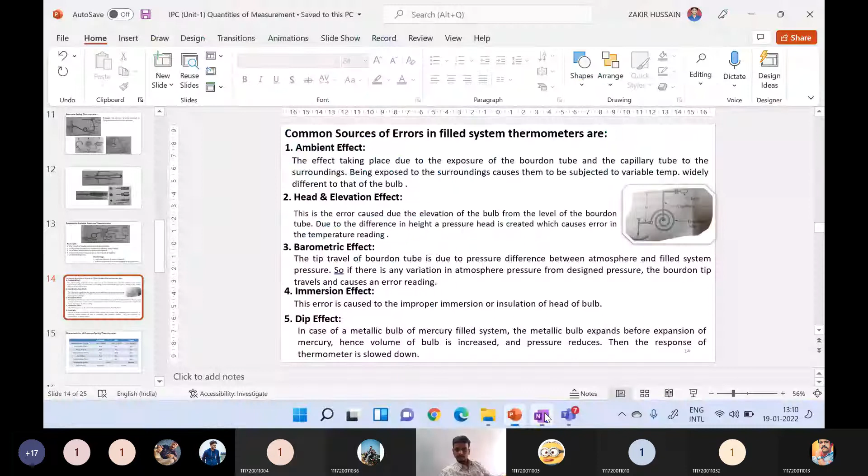So the first one is the ambient temperature effect. What is this ambient temperature effect? At this thermometer bulb condition, there will be some other ambient conditions. Some contaminants will be there, some temperature differences will be there at this particular location. The ambient temperature effect is caused due to the temperature difference between the surrounding atmosphere and the measuring bulb. The measuring bulb will have a certain temperature TB, and the surrounding ambient will have some ambient temperature TA. Because of this difference between TB and TA, some errors will be produced. That type of error is called the ambient temperature effect.

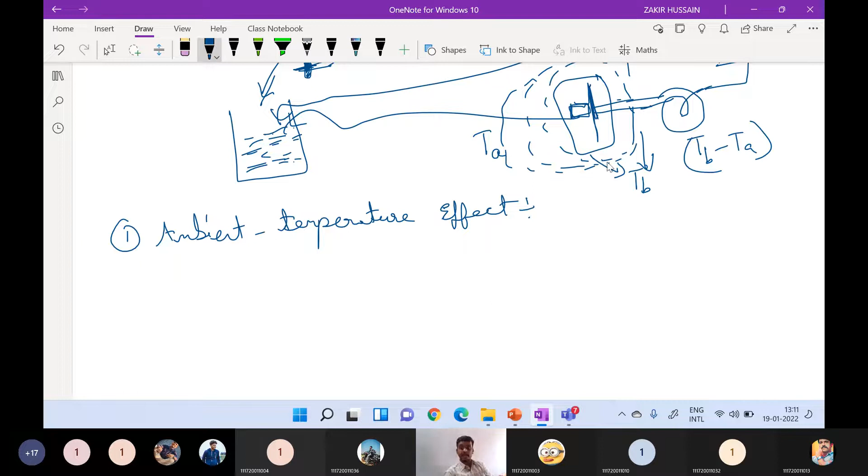Therefore, it needs to be compensated. That ambient temperature compensation needs to be adopted in such types of thermometers. Especially this is a special case in the gas expansion thermometer, the pressure spring thermometers. Why? Because whenever there is a difference between the ambient temperature and the bulb temperature, what happens? The pressure which goes inside the capillary and armor is received by the receiver, like a pressure gauge, the pressure spring. So this pressure spring deflection will be limited, or it will be more. Anything can happen due to this temperature difference between ambient and the bulb temperature.

Then the degree of this ambient error, whatever ambient error is produced here, depends on the temperature range of the instrument and the relative volume of the bulb, capillary and receiving element. The ambient temperature effect shows not only on this receiver, but also depends on the temperature range this particular thermometer possesses, the volume of that particular bulb, and how the capillary and the receiving element are. The receiving element is the pressure spring. This is the capillary and armor, and this is the bulb. So all things will be affected by the temperature effects caused at the ambient temperature conditions. I hope this is okay.

Ambient temperature effect. Do you understand that one? Yes, sir. Okay, then next one is head effect.

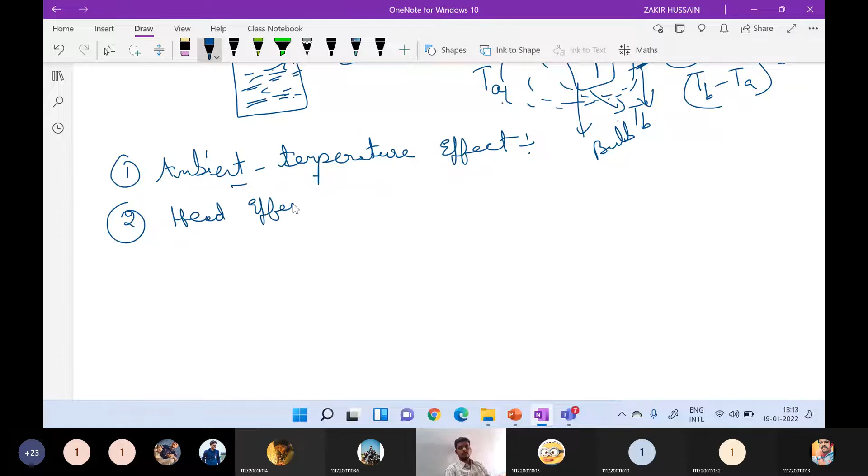Then the next one is the head effect. What is the head effect? For example, due to the change in the elevation of the bulb, whatever effects are caused are called head effects. In a pressure thermometer, if you consider this as the standard elevation of the bulb, the receiver can receive an accurate temperature prediction or accurate pressure deflection.

But the operator will locate this bulb at some other elevation, either a lower elevation or a higher elevation. Due to this elevation difference, whatever pressure difference is caused inside the capillary and armor will directly affect the pressure receiver, the pressure spring. The pressure spring receiver receives less pressure or more pressure, and there will be an error in the reading. So the head effect in the pressure thermometer is usually caused by placing the thermometer bulb at a considerably higher or lower elevation than the receiving element.

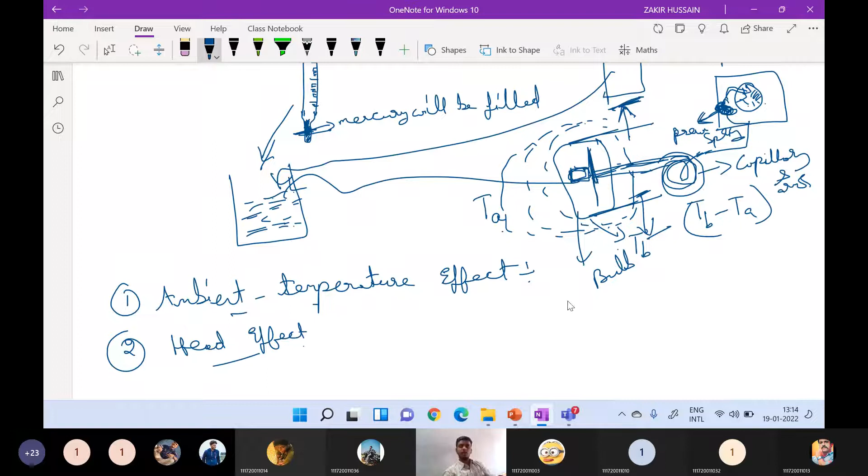So there should be some ideal position for this one. Otherwise, the operator usually will place the thermometer bulb at a higher or lower elevation. Due to this head effect, the bulb and the receiver, whatever the lesser or greater pressure which is caused, will directly show an effect on the pressure spring, which is the receiver. Due to this, there will be an error in the reading of the thermometer. That's what head effect is, caused due to the elevation difference, whether it's higher or lower.

And the third one is the barometric effect. Can anybody say what is barometric pressure? What is the relationship between atmospheric pressure and barometric pressure? So barometric pressure is nothing but atmospheric pressure. Barometric pressure or atmospheric pressure, both are the same.

Whenever the surrounding atmospheric pressure is different compared to the inside bulb pressure, then there is an effect called the barometric effect. In pressure spring thermometers, the error in the instrument reading is due to changes in the barometric pressure. Depending on how much fluctuation there is in the outside pressure, there will be corresponding errors.

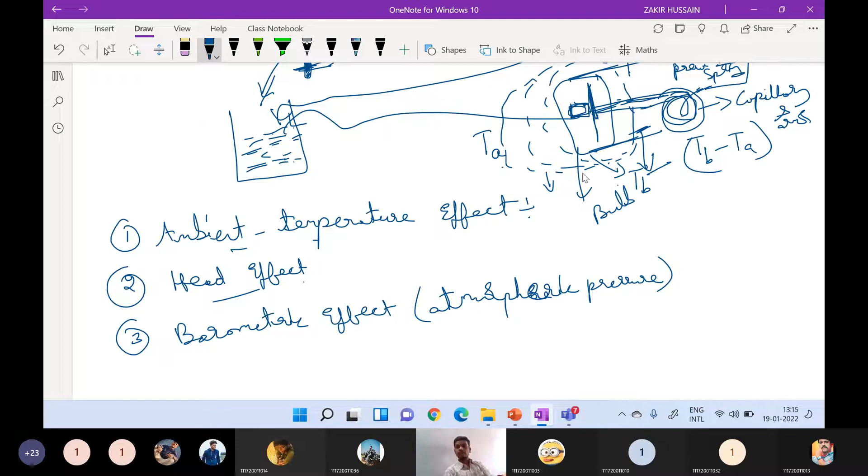The error occurs because of the pressure spring deflection. If the outside atmospheric pressure is very high, whatever pressure is exerting here will cause some effect in the pressure induced inside the capillary, armor, and bulb. This induced difference in pressure directly attacks the receiver, and corresponding error values will result from the external and internal pressure changes.

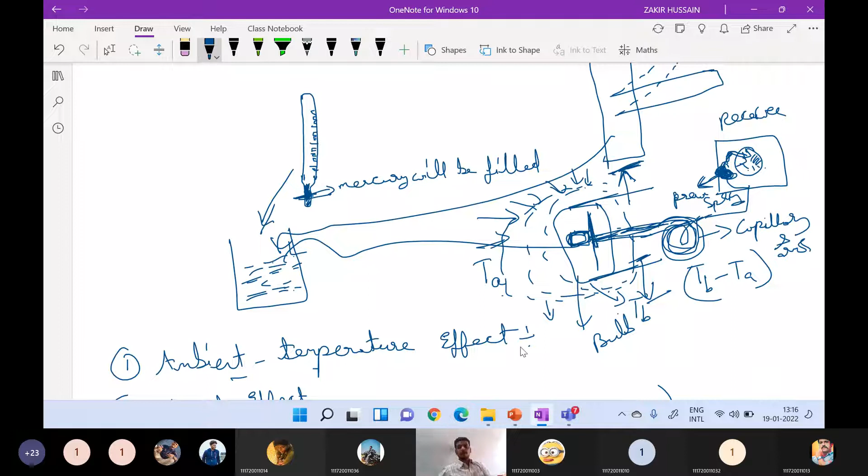So corresponding errors will be produced. Usually there should be some compensation for this. Barometric pressure, for example, is nothing but atmospheric pressure. And also we can say, what is absolute pressure? Absolute pressure is nothing but atmospheric pressure plus gauge pressure.

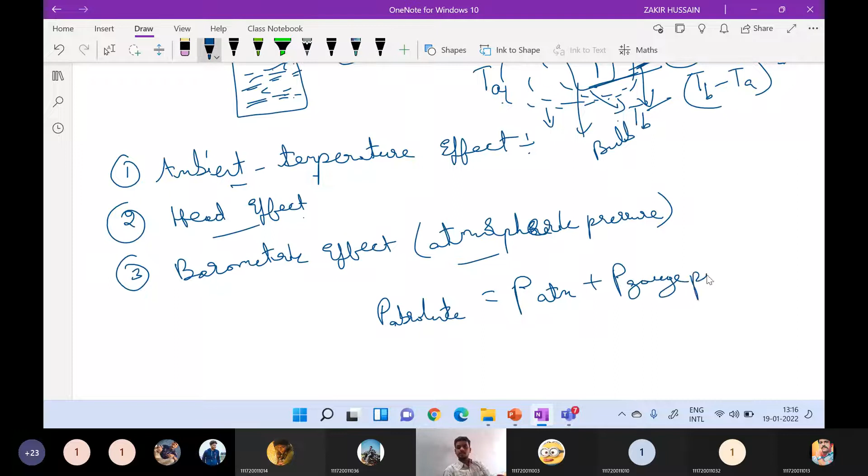Gauge pressure means, as you might have seen in the fluid mechanics course, whatever the manometers measure, that is called gauge pressure. A U-tube manometer or an inclined tube manometer, whatever pressure they measure, all these are called gauge pressures. To calculate absolute pressure, we have to add this gauge pressure with the atmospheric pressure. Then only it is called absolute pressure. That's the difference between absolute pressure, atmospheric pressure, and gauge pressure.

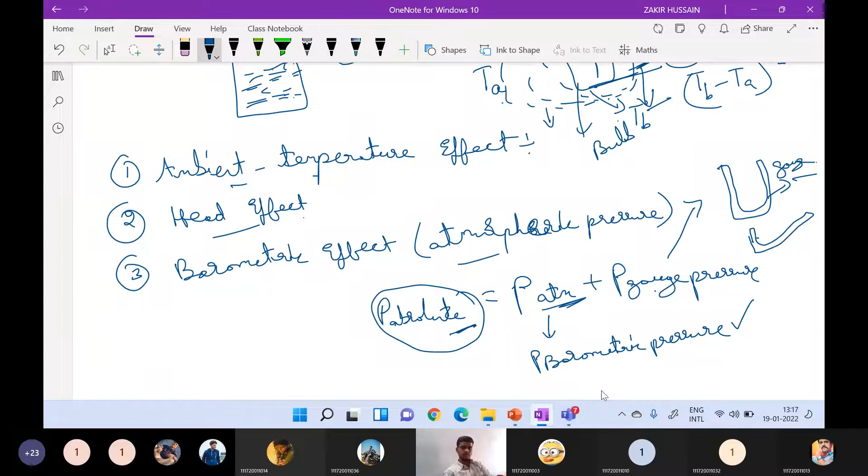This atmospheric pressure is also called barometric pressure. In weather stations, this is very popular - barometric pressure. By these conditions only, they predict whether rains are coming or not, and what type of cyclones are coming. All this is predicted using this. Head effect and barometric effect, is that okay? Do you understand that? Yes sir, yes sir.

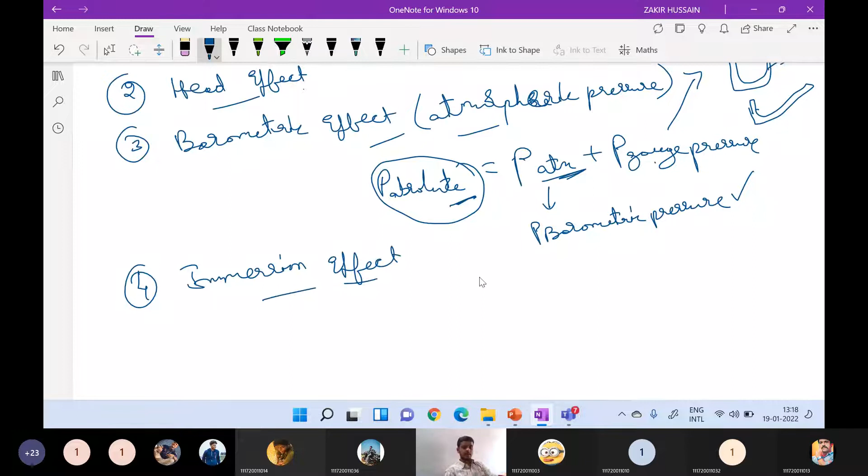Then the fourth effect is the immersion effect. This immersion effect results from the conduction of heat along the bulb's thermal well. By reducing the temperature at the bulb, it causes an error that is called conduction error, or we can say immersion error. If the thermometer bulb, for example a mercury-in-glass thermometer, is inserted into a hot water bath.

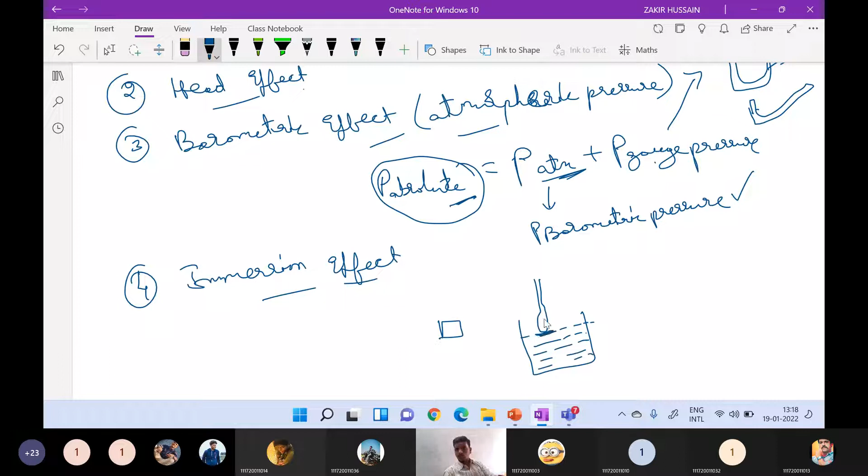So until this level, your hot water bath is there. You are inserting only this much. Now how will the conduction happen? By sensing the vapor temperature around this hot water bath.

This temperature, the thermometer has to show the temperature in this condition. And for example, in another condition, this is a hot water bath. In this hot water bath, if you dip your thermometer bulb like this, it will give you a correct reading. Why? Because there will be heat transfer or heat conduction from this hot water bath to the walls of this thermometer, or the thermal well of the thermometer. Then a proper conduction will take place.

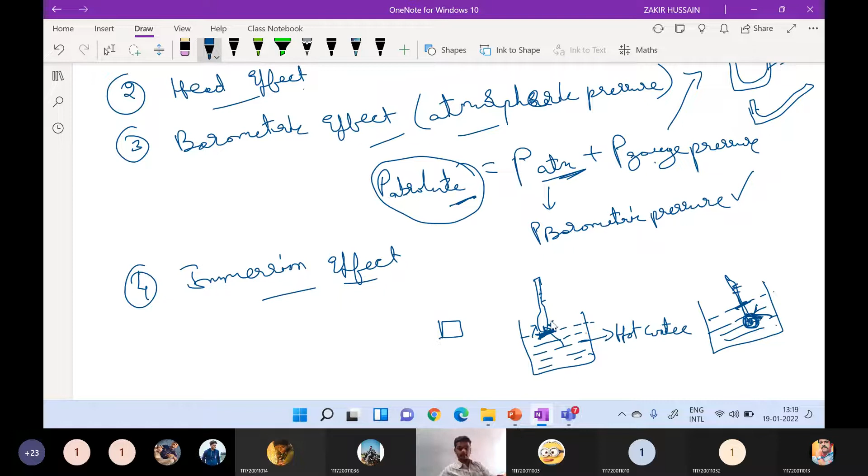Due to this proper conduction, the mercury inside will be expanded correctly and it will show you an accurate reading. So if you are not immersing this correctly, it will cause error values. Due to the limited heat supply between the hot water bath and the thermometer, this type of error is very high.

Next we can say this is a dip effect. This dip effect is usually caused in the metallic bulb of a mercury in glass thermometer. For example, the same thermometer: if you are immersing it into the hot water bath, what is the principle of operation of this mercury in glass thermometer? Whenever there is heat, the heat energy has to be transferred from the hot water bath to the bulb, and inside the bulb there is mercury. That mercury has to expand like this. Then only we can read the reading.

In the dip effect, what happens? Before expansion of the mercury, the bulb itself will expand. Due to this expansion, the bulb volume will be increased. Because of this increased volume in the bulb, that will cause a dip effect, and that will not show an accurate reading. So the fifth effect is called the dip effect. In the principle of the mercury in glass thermometer, mercury should expand,

not the bulb. The bulb only holds the mercury inside, that's its role. But in the dip effect, the bulb will expand first. Due to this bulb expansion, the volume of the bulb will be increased. Because of this increased volume of the bulb, whatever effect is caused is called the dip effect. I hope this is clear.

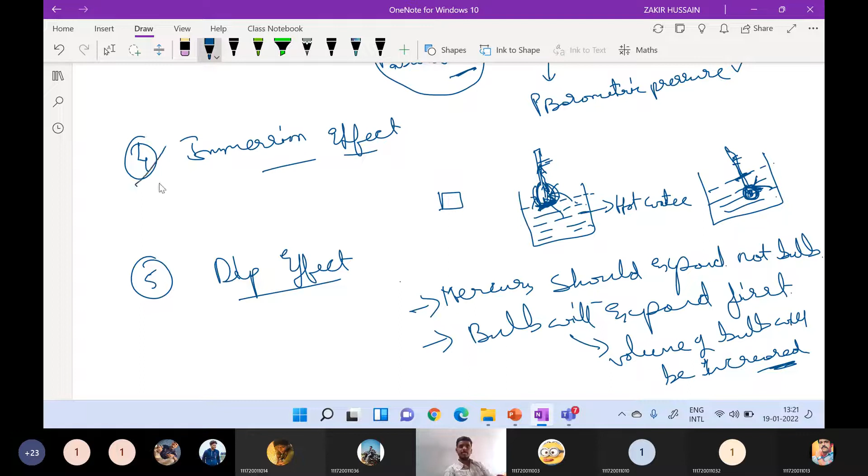Immersion and dip effect. Sir, in the dip effect, we can't find the temperature accurately, because the bulb is already absorbing the temperature and getting its volume expanded. Yes, that's what the effect means. That's an error. Under such conditions, we cannot rely on that particular thermometer. We have to change it.

So in the case of a metallic bulb of a mercury filled system, the metallic bulb expands before expansion of the mercury. Hence the volume of the bulb is increased and the pressure reduces. Then the response of the thermometer is slowed down. If the response is slowed down, there is no use of using that type of thermometer. Absolutely right. Okay, Jeevan? Yes, sir.

Okay, in summary, there are 5 different types of effects or errors which are induced during the operation of this type of immersion thermometers, especially the pressure spring, solid expansion thermometers like bimetallic, and the mercury in glass thermometer. The first one is the ambient effect, or more precisely the ambient temperature effect. Due to the difference in the ambient temperature around the bulb, there will be a negative or positive deflection in the pressure spring or Bourdon tube. So the pointer reading will show an error.

And the next one is the head and elevation effect. If the elevation is according to the standard, then it is okay. If the operator locates this bulb at a higher or lower elevation, then there will be a difference in the pressure. That pressure difference will have an effect on the pressure receiver. Here the pressure receiver is the Bourdon tube or pressure spring.

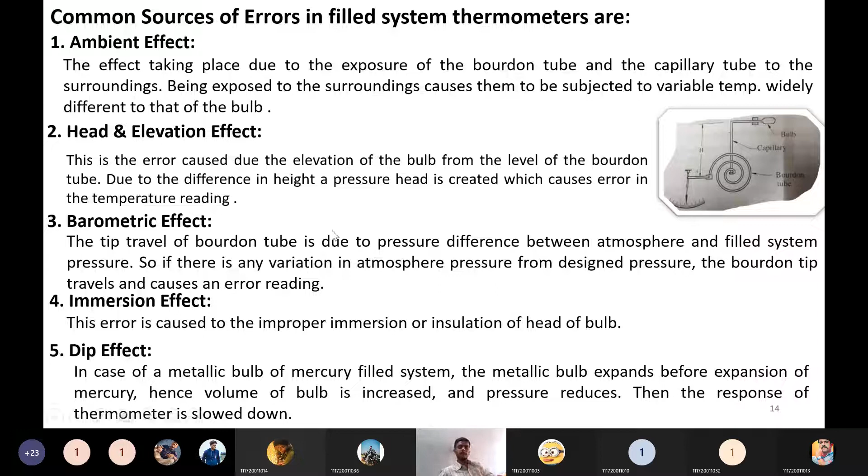And due to this increased volume, the pressure will decrease. So mainly in the operation of this type of thermometer, pressure is the main criterion. If the pressure itself is decreasing, it will not show you an accurate reading. Those are the common sources of error in various filled system thermometers. Okay, I hope everybody understood this one.

And what about the ambient temperature effect on this type of thermometer? The ambient temperature effect will be there in the mercury in glass thermometer. Why? Because it operates by sensing or conduction of the heat around the bulb. So if the heat around the bulb deviates, or the ambient temperature is very different, then the bulb will have some inaccuracy in the operation of the thermometer. So there will be an ambient temperature effect on the mercury in glass thermometer and the gas thermometer, and there is no ambient temperature effect on the vapor filled thermometer. Why? Because vapor expands depending on its pressure difference. Vapor pressures come into the operation here.

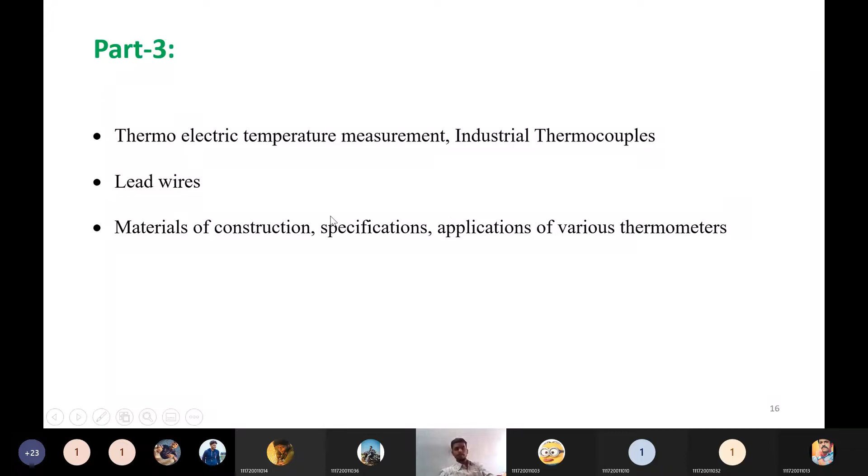Then materials of construction. What type of construction material we have to use, like copper, constantan, alumel, chromel, and what types of materials are compatible with which types of lead wires and thermocouples, along with their specifications, and to what extent we can apply them, we will see in this particular topic. So this is also a very small part. We'll just go through it. The first one will be thermoelectricity.

Before that, what is the importance of thermoelectric temperature measurement, or of industrial processing at higher temperatures? Especially in the steel manufacturing industry, glass manufacturing industry, ceramic industry or cement manufacturing industry, there will be a need to measure temperatures greater than 2000 degrees Fahrenheit, nearly 2000 to 3000 degrees Fahrenheit. Under such conditions, no operator can go and dip a mercury in glass thermometer there. No operator can go to that point.

He cannot measure such a high temperature by inserting a mercury in glass thermometer. Our body temperature is very low, around 95, 100 or 105 degrees Fahrenheit at most. That's why we can use a mercury in glass thermometer and put it in our mouth. Our mouth is a moderate medium. But what about the industrial process? They have to measure more than 2000 or more than 3000 degrees Fahrenheit. Under such conditions, no operator will insert this thermometer in that kiln or furnace. We cannot insert it; there will be damage whenever there is direct contact.

Because of this, we have to use thermocouples or some suitable thermoelectric principles. Temperature measurement between 1000 and 3000 degrees Fahrenheit is usually governed by radiation heat transfer, which is very advantageous. Nowadays, whatever pyrometers we are using, due to the radiation phenomenon only, we are able to measure body temperatures without touching.

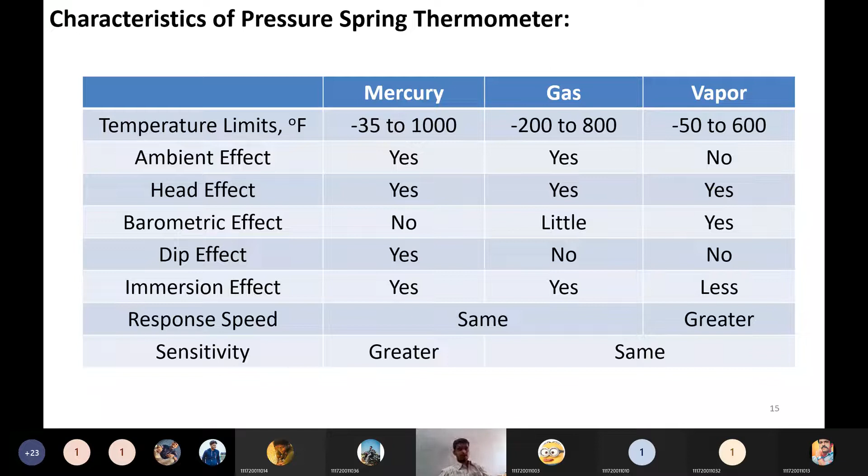So they are very much suitable, especially for industrial applications. The majority of industrial applications use thermocouples. So those are the advantages and the principles behind the operation of thermocouples. Thermoelectricity plays a major role in the construction of these thermocouples.

Just assume that there is a simple thermocouple circuit. This thermocouple circuit is composed of two dissimilar wires. They are not equal wires; they are very much dissimilar in their conduction and resistance. They are joined at two terminals. One terminal is called the measuring junction, and the other is called the reference junction. Usually the measuring junction temperature will be very high and the reference junction temperature will be very low.

The measuring junction will be placed near the medium, near the kiln or near the furnace, or some manufacturing process. Then the reference junction will be placed at a far away place, so we can read the temperature there. Due to the flow of heat by conduction from the measuring junction to the reference junction, an electromotive force, which we call thermal EMF, will be generated.

Due to this generation of thermal EMF, current flows from the measuring junction to the reference junction. This thermal EMF is measured using a suitable measuring device. That device gives an accurate reading based on a linear, proportional relationship between the thermal EMF generated and the temperature in the medium at the measuring junction. Then we can directly read a reliable and accurate temperature at the reference junction, standing at a very far away place.

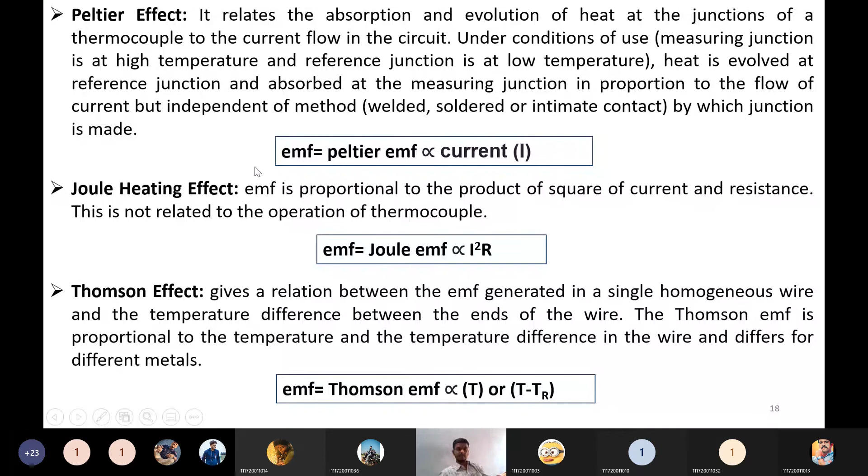Yes, sir. So in the operation of thermocouple, three laws are used. One is the Seebeck effect. Next one is Peltier effect and Thomson effect. We can neglect this Joule heating effect. But in the examination, you have to write this Joule heating effect also.

The next topic is the laws of thermoelectric circuit composed of homogeneous conductors. Here in the thermocouples, what happens? This is the measuring junction. This is the reference junction. So in between them, there are many wires will be there. This is a simple circuit, but in the complex circuit or the industrial thermocouple setup, there are many wires to connect this measuring junction with the reference junction. Where we have to connect that wire, whether connecting that wires to this thermocouple measuring junction and reference junction will have an effect on the EMF, will have an effect on the temperature. So how that effect will be there, what type of effect will be there, how we can add the wires in between the circuit, that will be governed by this laws.

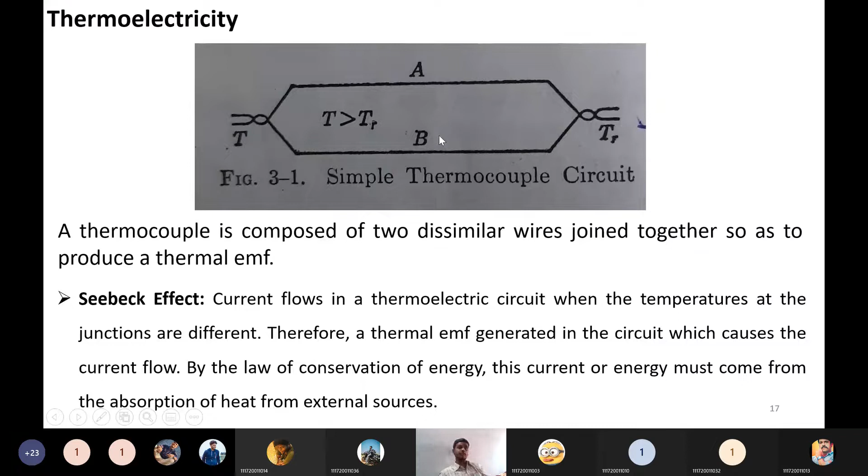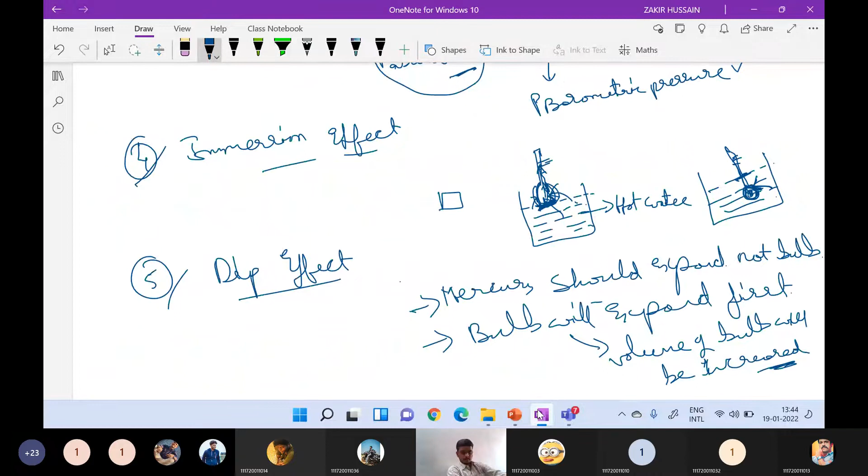So meaning of this one is, for example, the first law is law of homogeneous circuit. What this law is saying is, whatever the EMF which is generated, if the thermocouple is composed of two dissimilar metals, for example, so the temperature T and temperature TR is there. Whatever the EMF which is generated in this thermocouple, this EMF is only the function of these temperatures. No matter whether the temperature here is different, here is different, here is different, they will not have any effect. So for example, this is T1, T2, T3, T4, T5.

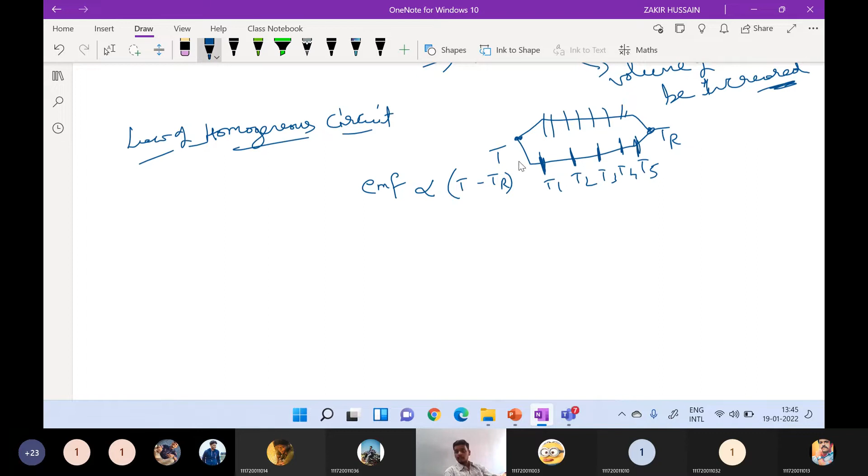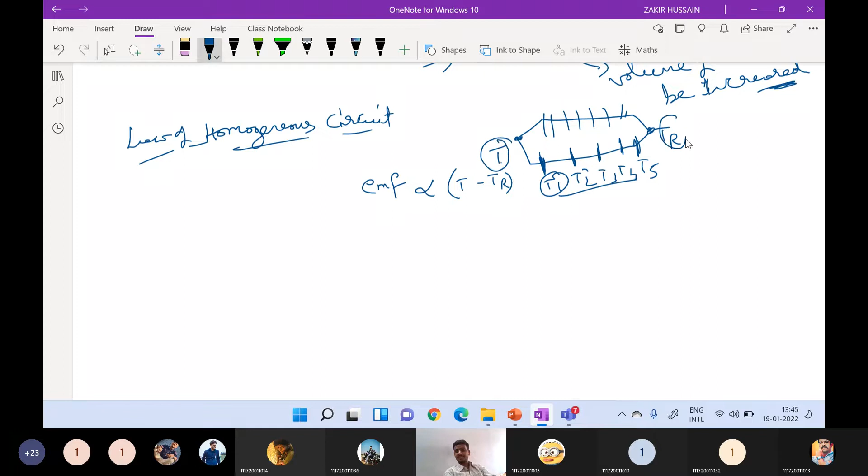If the temperature T1 is different from T, no matter what the intermediate temperatures are, the thermal EMF generated is only a function of T and TR. That is called the law of homogeneous circuit.

The thermal EMF developed in the thermocouple when the measuring junction T is at a different temperature from the reference junction TR is independent of the temperature gradient and its distribution along the wire. The only temperatures related to thermal EMF are the measuring junction temperature and the reference junction temperature TR, and all other intermediate temperatures are of no consequence. So that is called the law of homogeneous circuit. Is that clear?

Yes, sir. This is not due to any derivation, only due to experimental facts. This law has been given by experimental facts, not due to anything else. They have not proved it through any equations or derivations. This fact has only been observed through experiment.

So the next law is called the law of intermediate metals. Whatever wires we insert, lead wires or any dissimilar wires, will be entirely dependent on this law. The algebraic sum of the thermal EMFs in a circuit composed of a number of dissimilar metals is 0 if the entire circuit is at a uniform temperature. So what this law is saying is,

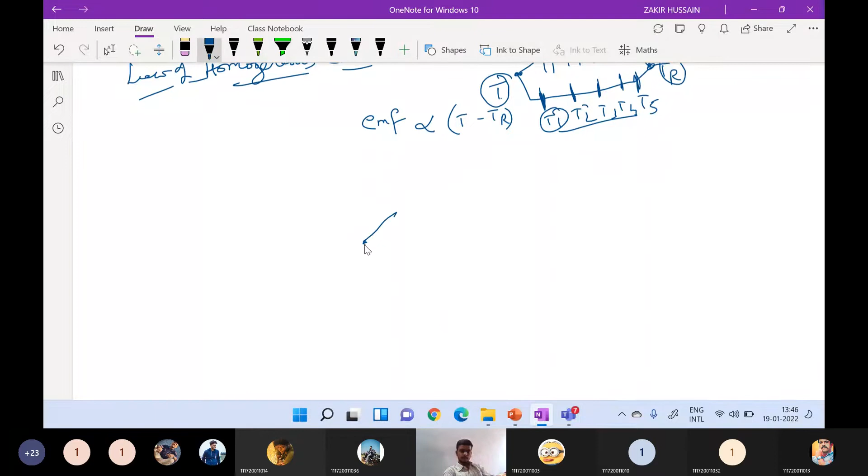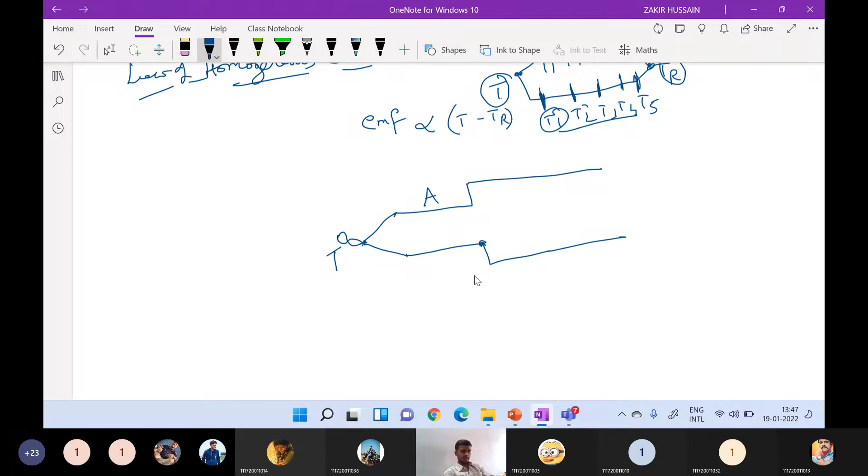for example, if there is a thermocouple with a measuring junction like this, and then you add some intermediate metals, some lead wire, like this. This is the measuring junction T, this is metal A and this is metal B, and you are adding some lead wire C. Here you fix some joint, and here also some joint. Say this is some metal B only. Then you join further with the reference junction TR like this, and to measure the EMF, you connect a galvanometer here.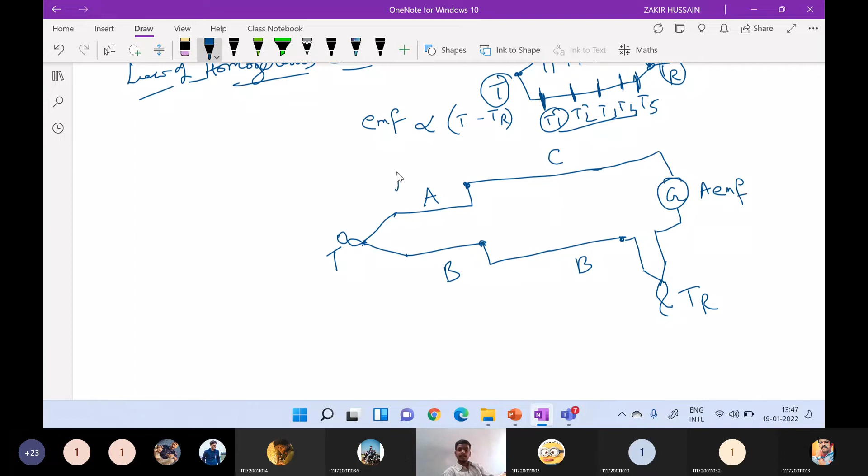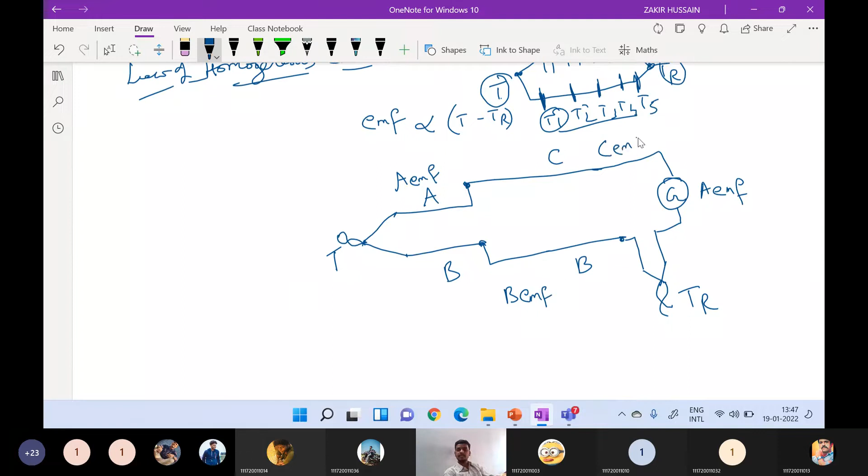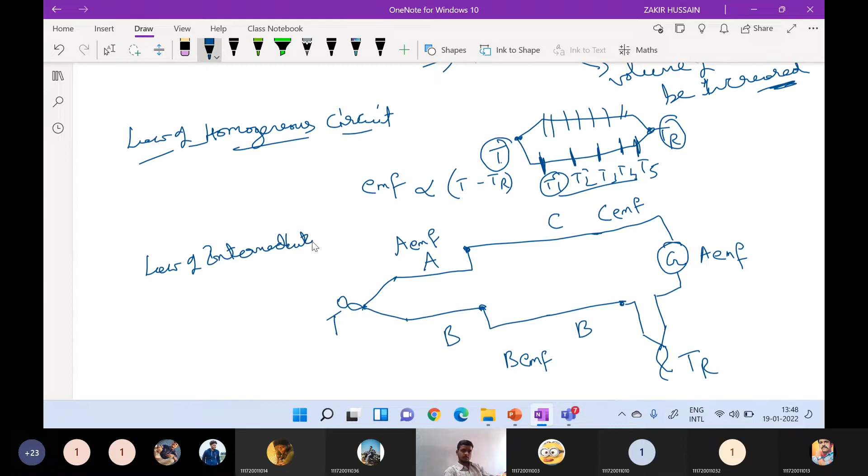What happens here is that in metal A, an EMF will be generated, called E_A. In metal B, the EMF generated is called E_B. And in metal C, the EMF generated is called E_C. So now what does the law of intermediate metals say? The algebraic sum of this E_A plus E_B plus E_C should be equal to 0.

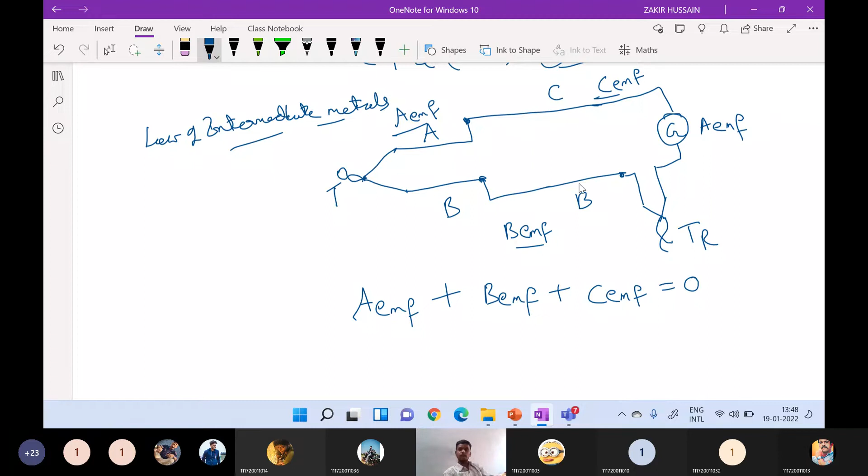Then only the thermocouple will operate properly. Otherwise, there will be a heat difference, some hot spots will come, and some hysteresis will be formed here. If you don't want to form hysteresis or result in damage to these thermocouples, the algebraic sum of the EMFs in any thermocouple circuit should be equal to 0. That is what is said by the law of intermediate metals: the algebraic sum of thermal EMFs in a circuit composed of any number of dissimilar metals is 0 if the entire circuit is at a uniform temperature. So the only necessary condition is that the whole circuit needs to be at a uniform temperature.

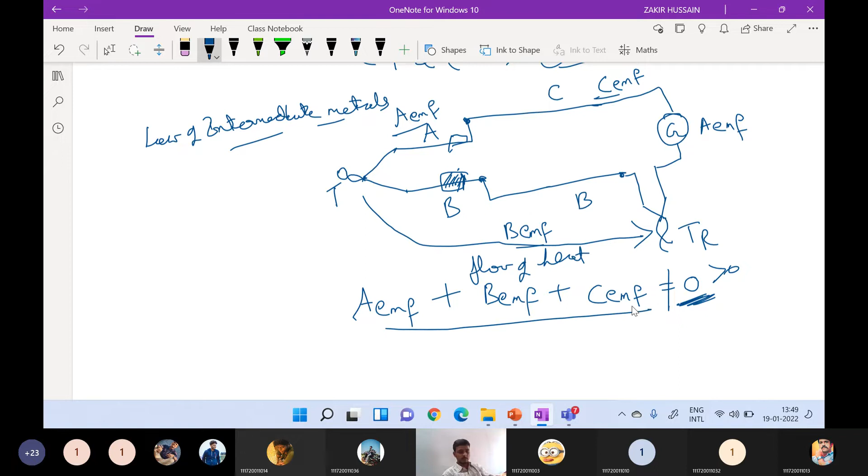This law follows directly from the second law of thermodynamics. If a net EMF did exist, meaning it is net positive, not equal to 0 but some value greater than 0, then this would result in a reverse flow of heat. The flow of heat has to be from T, the measuring junction, to TR. If the algebraic sum of thermal EMFs is not equal to 0, then reverse flow of heat is possible under such conditions, and that is against the second law of thermodynamics.

Heat cannot travel from a lower temperature region to a higher temperature region unless we give some external work. If you are not giving external work but it is still traveling from lower to higher temperature, that is contrary to the second law of thermodynamics. For that not to happen, this condition has to be satisfied. The law of intermediate metals condition is that the algebraic sum of the thermal EMFs generated in the circuit is equal to 0.

That is the fact of this law of intermediate metals. This law follows directly from the second law of thermodynamics. If a net EMF did exist, meaning positive, then the resulting flow of electric current would cause heating in some parts of the circuit, thereby transferring heat from a lower temperature to a higher temperature without application of external work. This type of flow is contrary to the second law of thermodynamics.

So that is not acceptable. That's why the net, the algebraic sum of all the EMFs, needs to be 0. It should be 0. Okay, then this is okay. Law of intermediate metals.

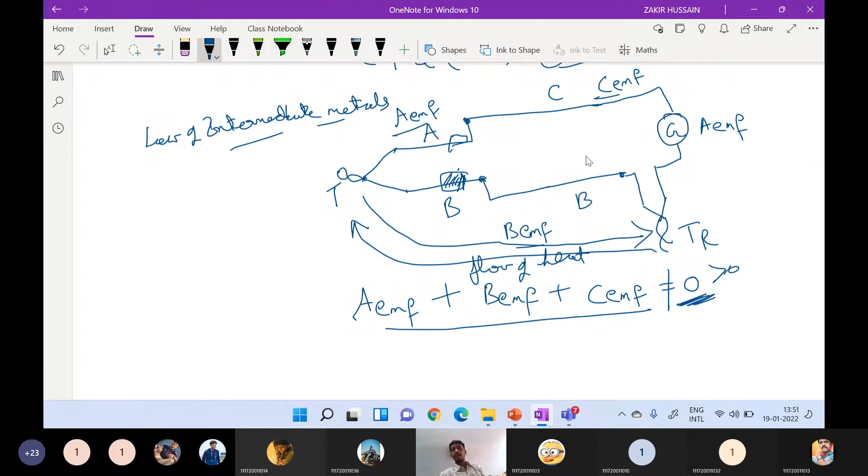So by the combination of this law of intermediate metals and the law of homogeneous circuit, it is possible to insert a measuring device or a connecting wire C into the thermocouple. Because of these two laws only, it is very much possible to extend the measuring junction from the reference junction by connecting some other lead wires and also a galvanometer device to measure the EMF in the thermocouple circuit. At any point we can connect this. Because of these two laws only, it is possible.

Without these two laws, we cannot add the lead wires as such. We cannot extend the thermocouple wires. Okay, then the third law is called the law of intermediate temperatures. What this law is saying: the thermal EMF developed by any thermocouple of homogeneous metal with its junctions at temperatures T1 and T3 respectively is the algebraic sum of the EMF of the thermocouple with its junctions at temperatures T1 and T2 respectively, and the EMF of the same thermocouple with its junctions at temperatures T2 and T3 respectively. So this law is nothing but like this.

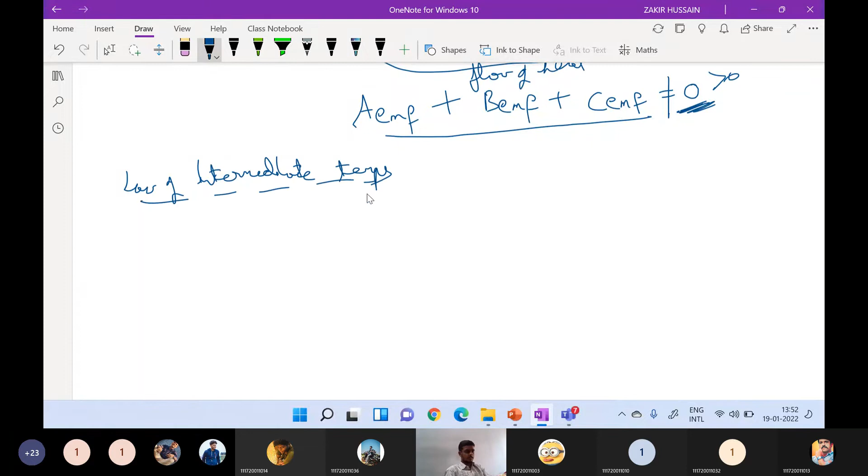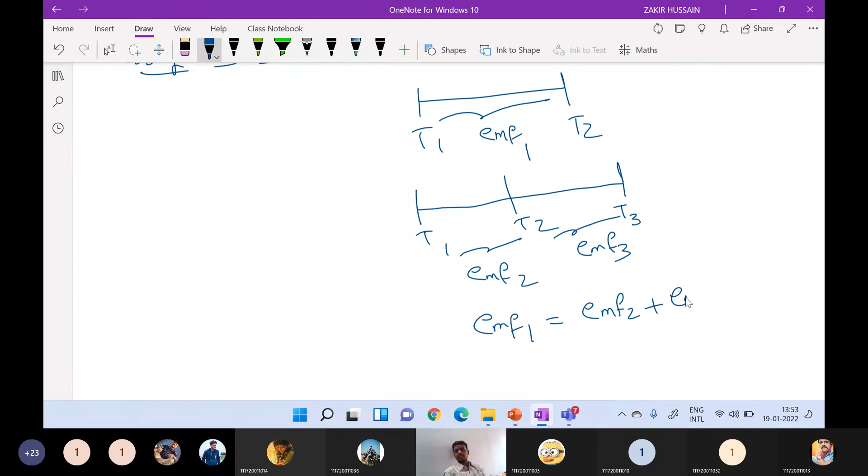Law of intermediate temperatures. What this law is saying is, for example, if you have two different temperatures, T1 and T2, then the EMF generated because of the temperature difference, we will say, is EMF 1. Then if you have the same junction at T2 and the other junction at temperature T3, and the EMF generated between T2 and T3 is EMF 3 and between T1 and T2 is EMF 2, according to the law of intermediate temperatures EMF 1 is equal to the sum of EMF 2 plus EMF 3. That's the statement of this particular law.

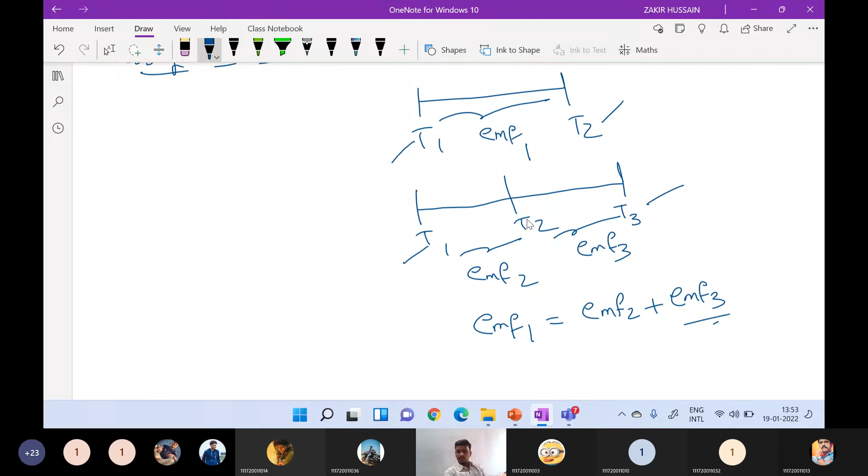Regardless of what the intermediate temperature is, if the end temperatures are the same, then whatever EMF is generated because of the different intermediate temperature, that should be the algebraic sum of the EMFs. It should be equal to the main EMF. That's the statement of this particular law.

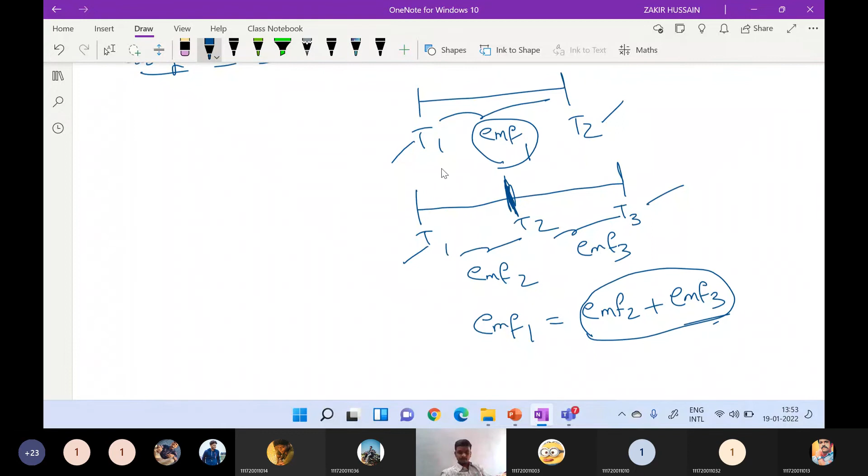This law deals with the calibration of thermocouples. If the thermal EMFs of several metals versus a reference metal such as platinum are known, the thermal EMF of any combination of these metals may be obtained by algebraic difference. So this law provides that if we know the thermal EMF of some reference metal wire, then we can predict the other metals' EMFs also, how they will be combined and how they will operate. We can easily know by adopting this law of intermediate temperatures.

So when all these three laws are combined, it is evident that the algebraic sum of the thermal EMFs generated in a thermocouple circuit containing any number of dissimilar homogeneous conductors is a function of only the temperatures of the junctions. This allows you to add any intermediate wires in between the thermocouples. According to Lord Kelvin, a thermocouple can be assumed to be a reversible heat engine, so it will function as a reversible heat engine. Is that clear?

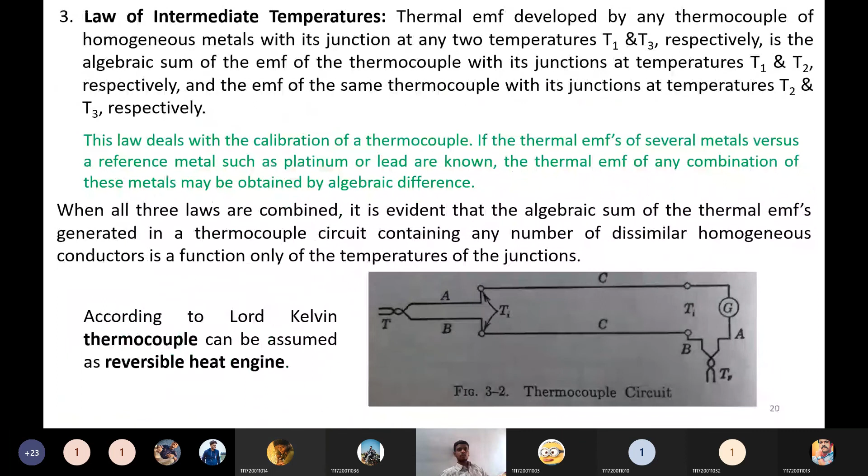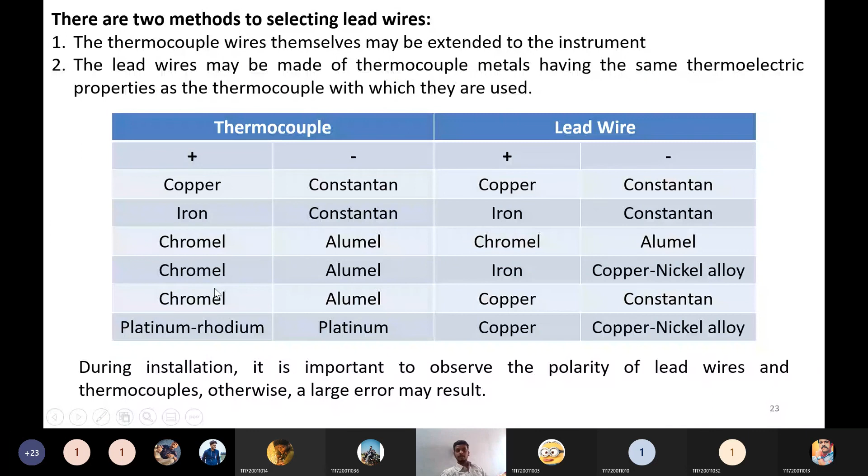Okay, so these were the three laws. Tomorrow we are going to see the construction of industrial thermocouples. What are the desirable characteristics? How to construct them? What are the other types of thermocouples? What lead wires are there? What are the compatible lead wires for the compatible thermocouples? And finally, we will see the thermowells, the protection devices. Finally, we will wind up this unit.